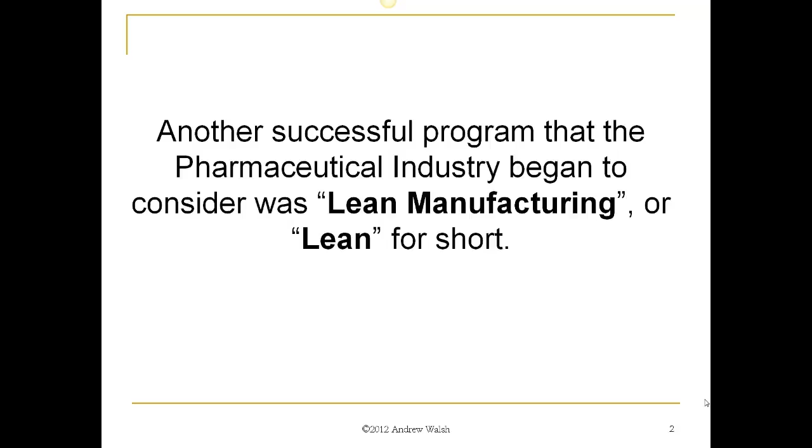Benjamin Franklin is recognized as one of the early thinkers on lean. He stated, on wasted time, he that idly loses 5 shillings worth of time loses 5 shillings, and might as well prudently throw 5 shillings into the river. Well said. On unnecessary cost, a penny saved is 2 pence clear. Save and have.

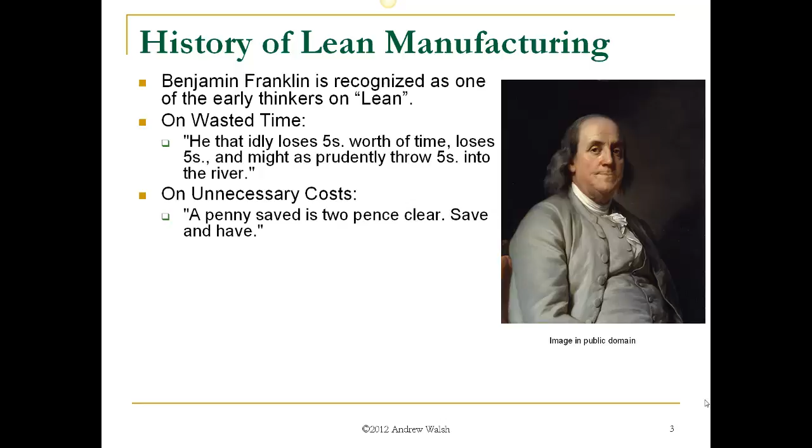On unnecessary inventory, you call them goods, but if you do not take care, they will prove evils to some of you. Buy what thou hast no need of, and ere long thou shalt sell thy necessaries. And many have been ruined by buying good pennyworths. How many of us have fallen prey to 50% off sales?

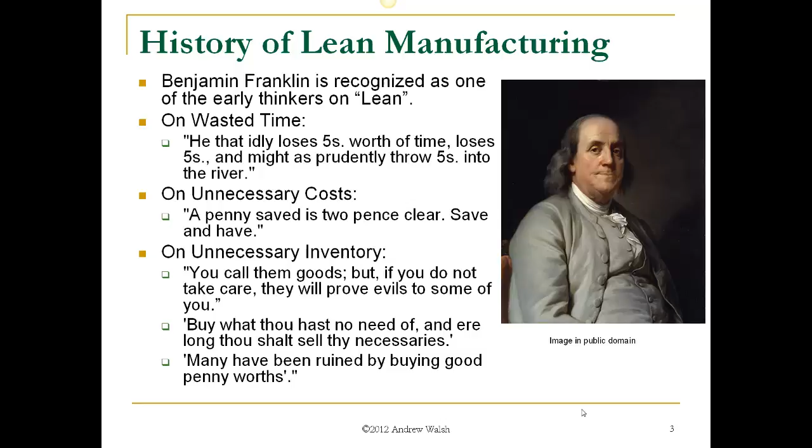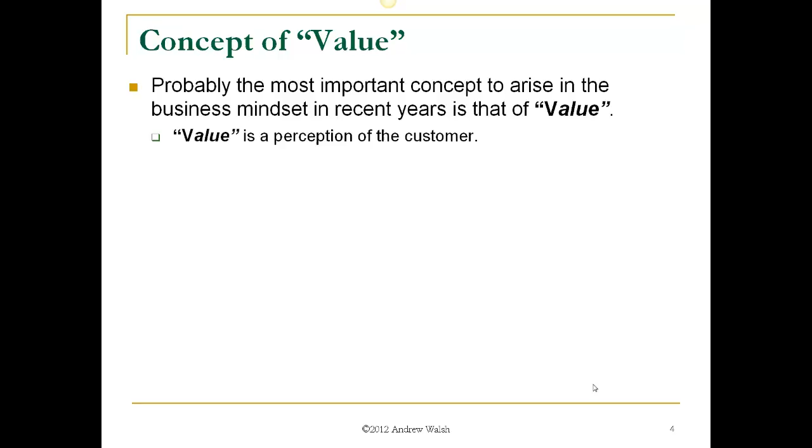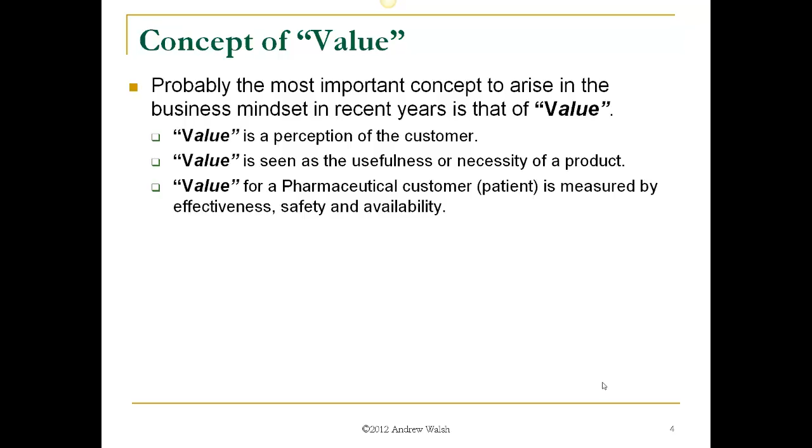Concept of value. Probably the most important concept to arise in the business mindset in recent years is that of value. Value is a perception of the customer. Value is seen as the usefulness or necessity of a product. Value for a pharmaceutical customer, a patient, is measured by the drug's effectiveness, its safety, and availability.

Value for a pharmaceutical customer, a distributor for instance, is measured by availability, the line item fill rate, delivery time, and other business requirements. Providing value to the customer will guarantee business success.

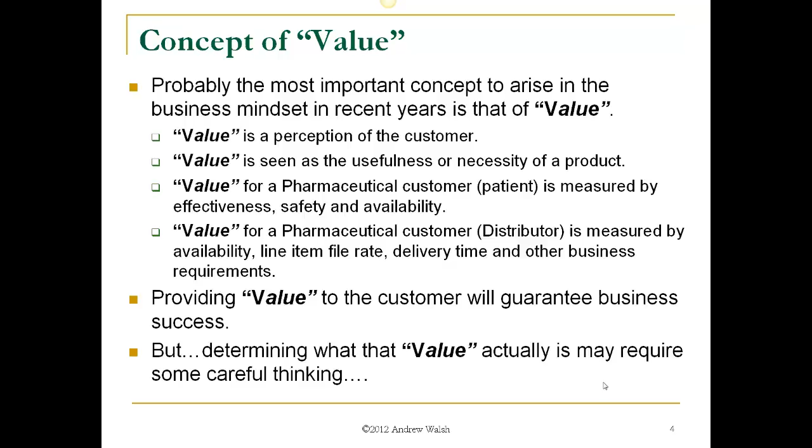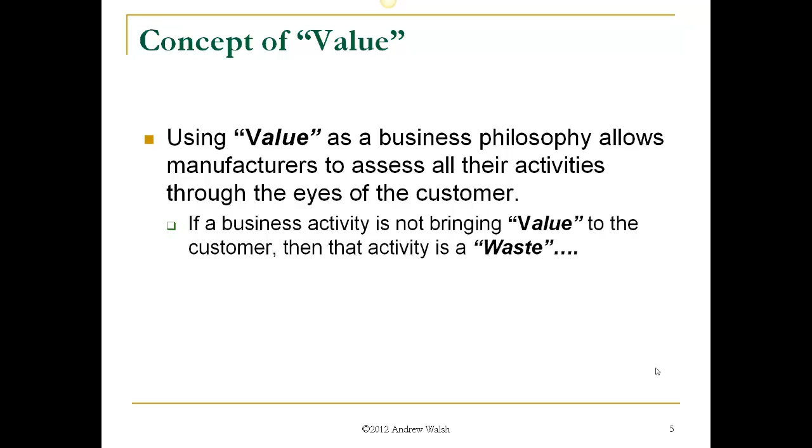However, determining what that value actually is may require some careful thinking on your part. Using value as a business philosophy allows manufacturers to assess all their activities through the eyes of the customer. If a business activity is not bringing value to the customer, then that activity is a waste.

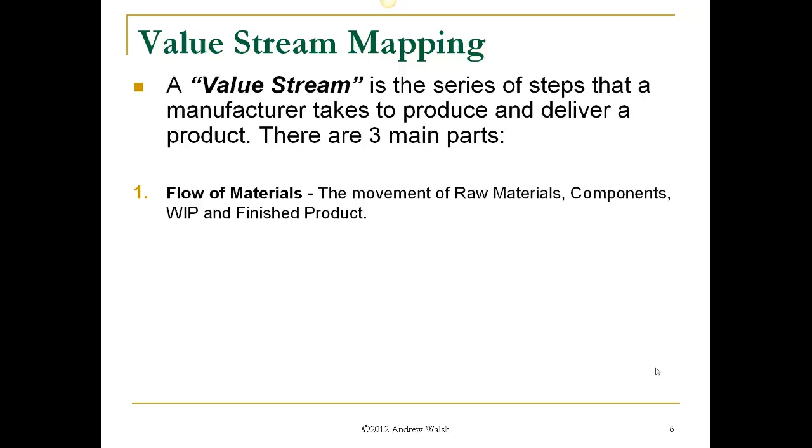A value stream is a series of steps that a manufacturer takes to produce and deliver a product. There are 3 main parts. The flow of materials, which is the movement of raw materials, components, work in progress, and finished product throughout the facility. The transformation of materials, where the raw materials and components are converted into the finished product.

And then the flow of information, which is the movement of information required to receive, process, and release raw materials, components, work in process, and finished product. For instance, the purchase orders for the raw materials, batch records for the batches, any investigation reports that needed to be processed, and analytical reports for release of raw materials and finished product.

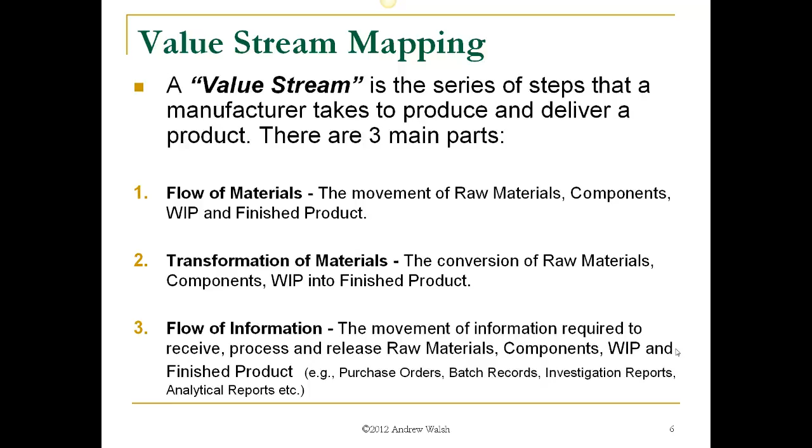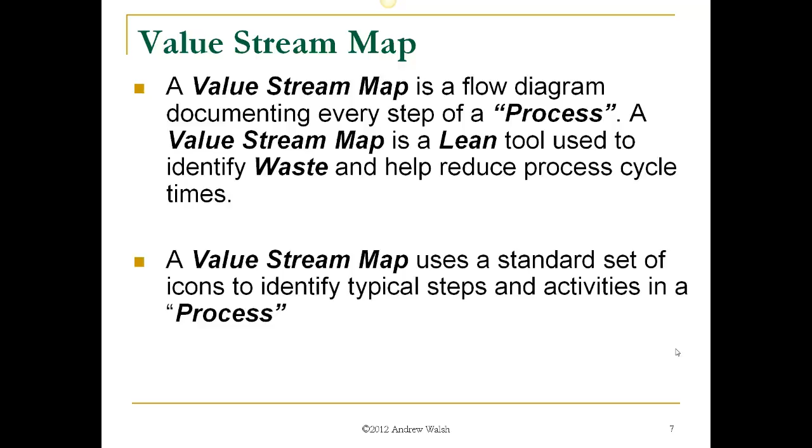A value stream map is a flow diagram documenting every step of a process. A value stream map is a lean tool used to identify waste and help reduce process cycle times. The value stream map uses a standard set of icons to identify typical steps and activities in a process.

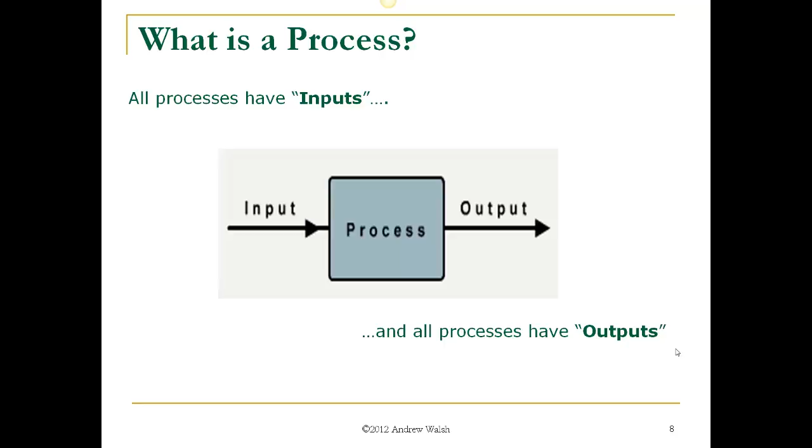What is a process? All processes have inputs, and all processes have outputs, as we will see in a few minutes. The value stream map uses a certain set of icons.

As you see on top left, outside sources, which would be raw material suppliers or even customers, are represented by a little house with 3 triangular roofs on it. Movement of materials is shown by a truck. Push and pull arrows are shown as I list them there. And the flow of information, etc., can be seen on these diagrams here.

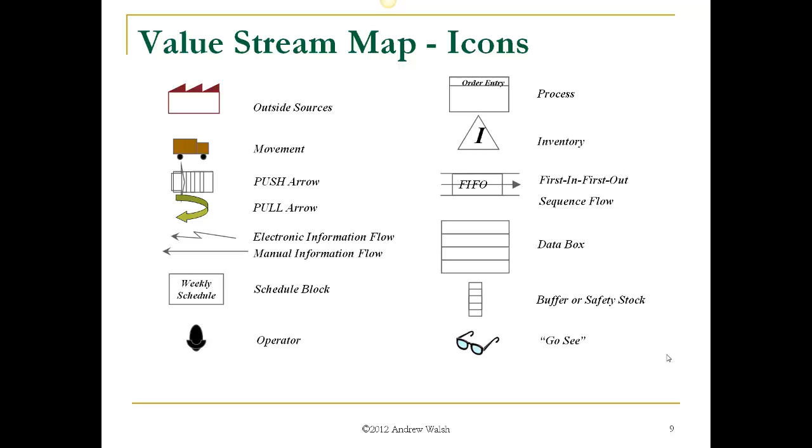Here's a value stream map. In the upper left-hand corner, we see 2 suppliers, so raw material suppliers who are sending in maybe components or excipients, and they arrive at receiving, which may take 8 days for them to be received and processed.

Then they would move into a blending operation where there's 1 operator, and let's say that takes about 60 minutes, an hour for him to process the blend. Then the blend may sit for 2 days before it moves on to granulating. And there's 2 operators in the granulation, maybe making the granulation solution, 1 guy, and the other one actually operating the granulator. And let's say that operation takes 60 minutes also.

Then the granulation will sit for 1 day before going to the compression area. There's 1 tablet press operator, and it may take him 10 hours to compress the entire batch. Then that batch may sit for 25 days before it goes on to packaging, where there may be 5 operators, and maybe take 12 hours to do the final finished packaging.

And then it may sit for 15 days before it moves on to being shipped, as it needs to be released. The finished product testing needs to be performed, all reconciliation, the batch record needs to be approved, etc. That gives us a total lead time of 52 days from the minute we get raw materials in, receive orders.

And there's only 1 day of value added time in that whole sequence. So only 1 day of the process time was value added. The rest was simply sitting in inventory.

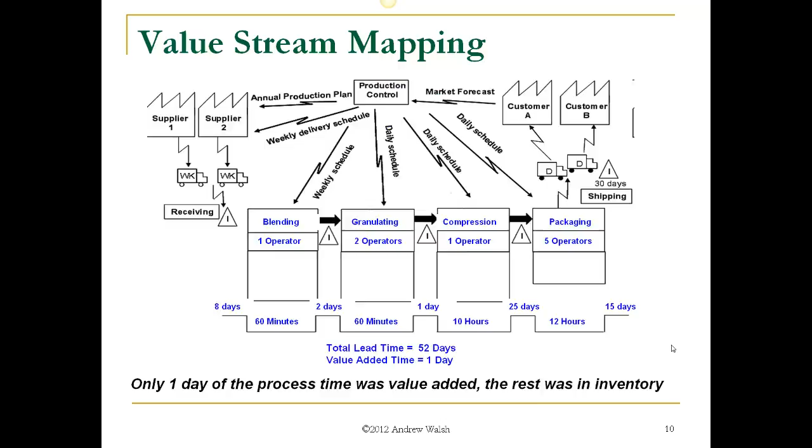And here we see the flow of materials. We see the transformation of materials and the flow of information all on this one diagram. So the entire process of manufacture is captured on one page here.

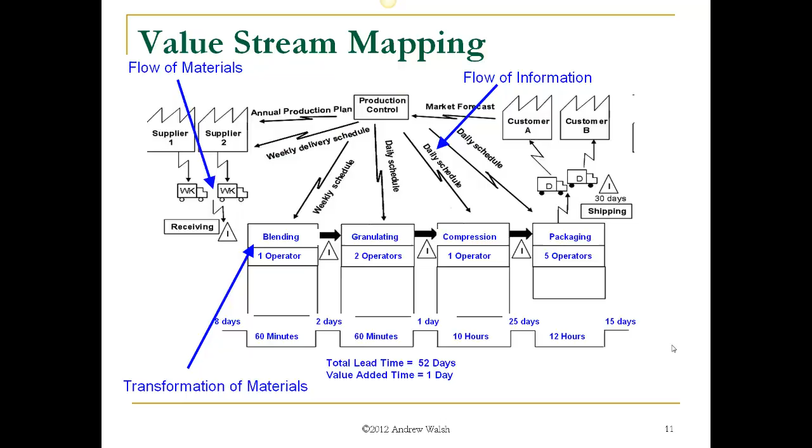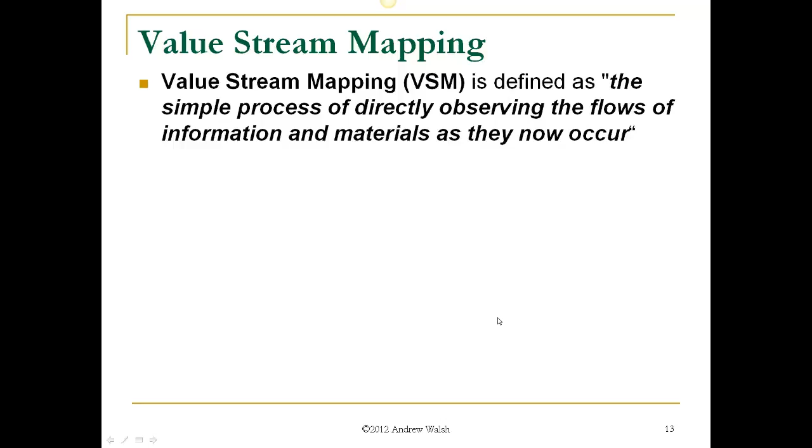Value stream mapping is defined as the simple process of directly observing the flows of information and materials as they now occur. This process allows companies to map the flow of products from raw materials entering the facility through all manufacturing process steps to the distribution department as finished product.

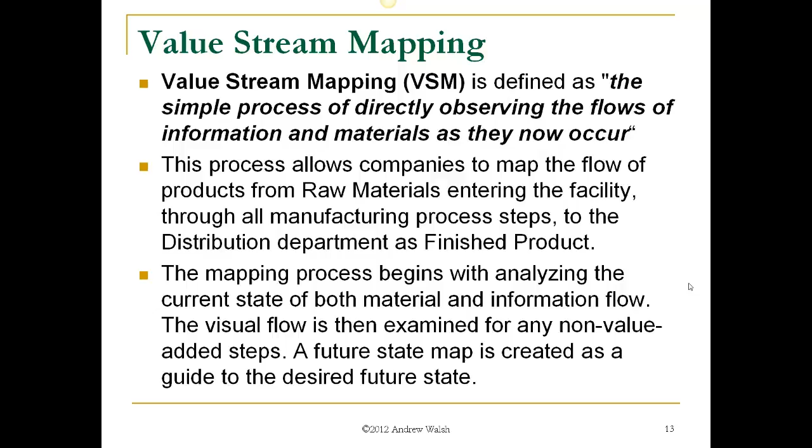The mapping process begins with analyzing the current state of both material and information flow. The visual flow is then examined for any non-value-added steps, and it's very easy to find them. A future state map is then created as a guide to the desired future state.

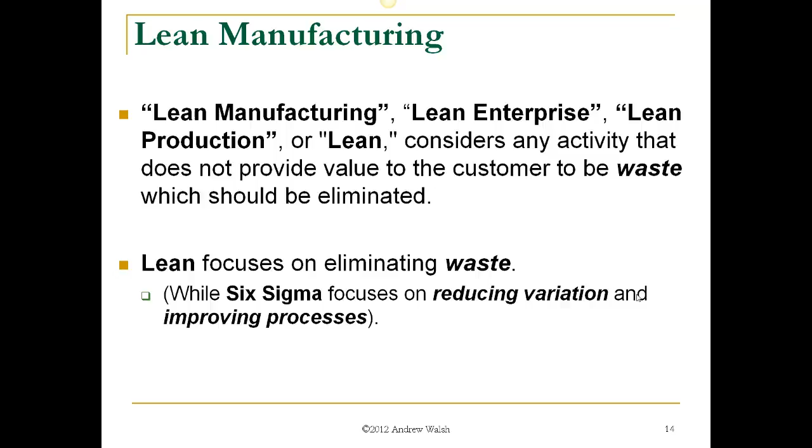Lean manufacturing, or lean enterprise, or lean production, or just simply lean, considers any activity that does not provide value to the customer to be waste, which should be eliminated. Lean focuses on eliminating waste, while Six Sigma focuses on reducing variation and improving processes. We'll see in the next module how those two can be combined to good effect.

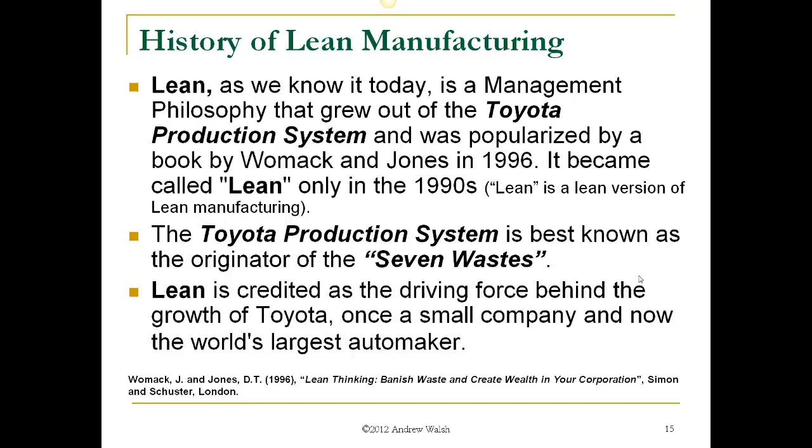Lean, as we know today, is a management philosophy that grew out of the Toyota production system and was really popularized by a book by Womack and Jones in 1996, and it became called Lean only in the 1990s. Lean, funnily, is a lean version of lean manufacturing. The Toyota production system is best known as the originator of the 7 wastes. Lean is credited as the driving force behind the growth of Toyota, once a little tiny company in Japan and now the world's largest automaker.

Toyota identified 3 forms of waste: muri, or unreasonable work demands placed on workers by management, asking for too fast or too heavy. I'm sure that will go over big here in the United States.

Mura, or unevenness in the execution of work. For example, production push at the end of a quarter to make better numbers. I've seen this where you want to make quota in order to get your bonuses, so we'll push more product out the door, stack them up, and make the numbers.

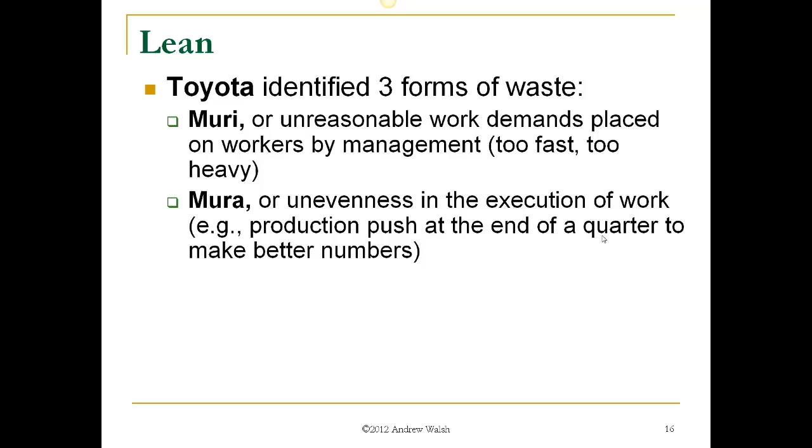Muda, or non-value-added work. Muda and Mura, when discovered, are directed back at Muri, so changes can be made to improve the overall process.

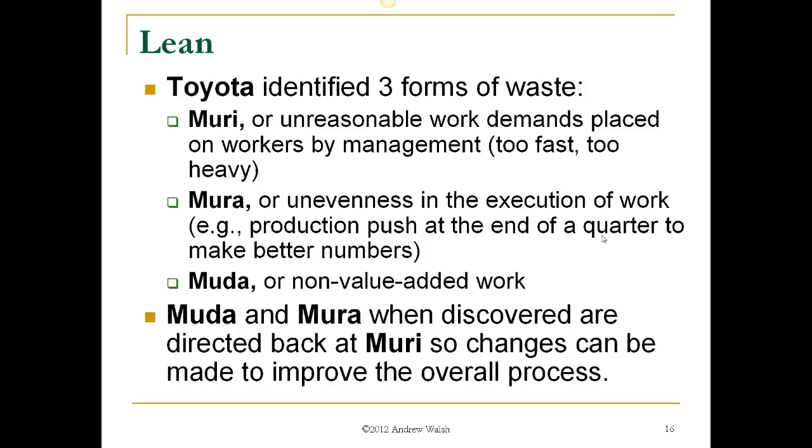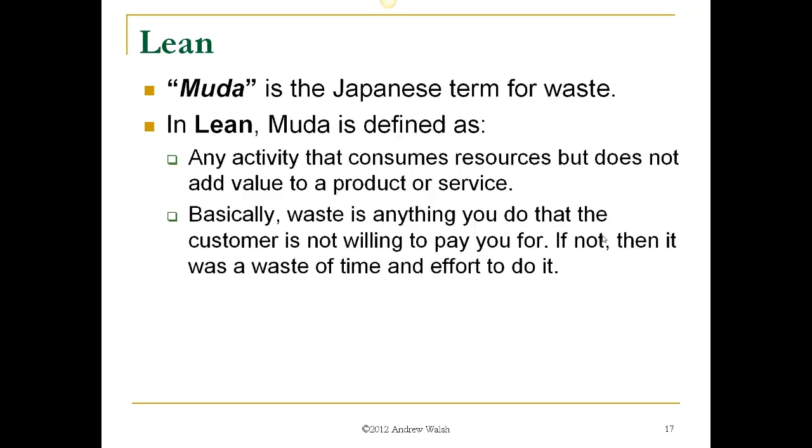Muda is the Japanese term for waste. In Lean, Muda is defined as any activity that consumes resources but does not add value to a product or service. Basically, waste is anything you do that the customer is not really willing to pay you for. If not, then it was a waste of time and effort to do it.

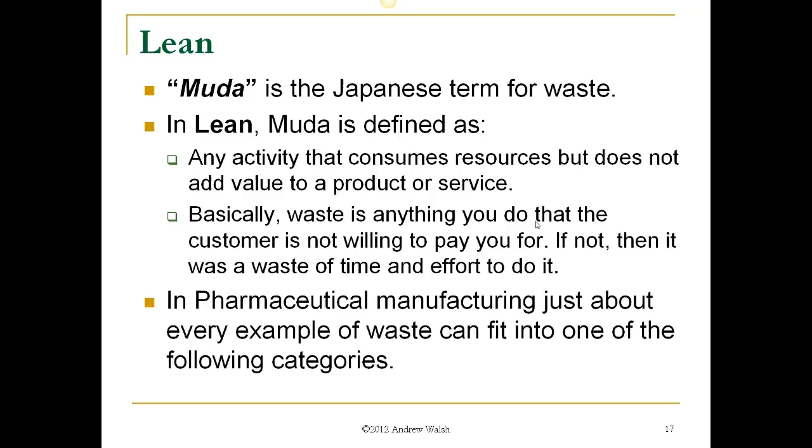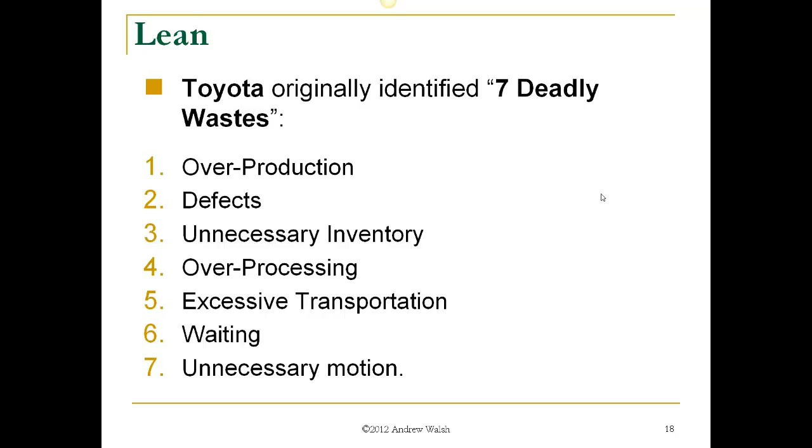In pharmaceutical manufacturing, just about every example of waste can fit into one of the following categories. Toyota originally identified 7 deadly wastes: overproduction, defects, unnecessary inventory, overprocessing, excessive transportation, waiting, and unnecessary motion.

Overproduction is when more product is produced than is actually ordered by your customers. Can you imagine going out for breakfast and ordering 3 pancakes and seeing the guy make 4, just in case?

Defects. Although defects are addressed under Six Sigma, defects are a waste due to the time and cost associated with their disposition, which the customer is not interested in paying you for.

Unnecessary inventory. This can take the form of excess raw materials and packaging components in storage, work in progress sitting around, and finished goods just standing in the warehouse being stored there.

Overprocessing. Any work done on a product that is not actually required by the customer, and this includes using equipment that is more complex or expensive than is required for that operation.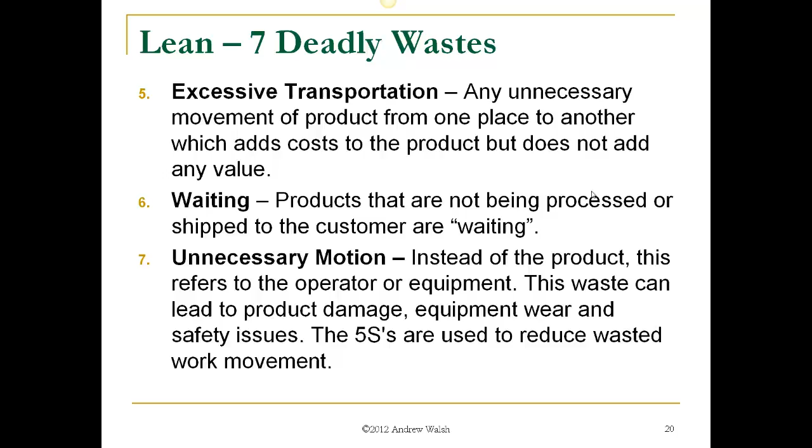The 5S's, which we'll see in a minute, are used to reduce wasted work movement.

There are 2 other wastes that have since been added: manufacturing products that customers don't want, for example maybe cheese-flavored soda—who wants that?—and unused human talent, for instance PhDs pushing a broom. Why would you have a PhD with all that education operating a broom?

There are now up to 11 additional wastes, and I won't get into them. The lean people are getting very creative with creating more waste.

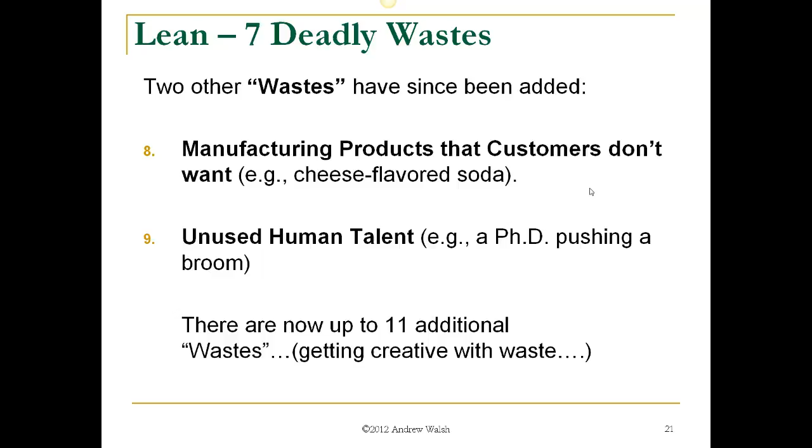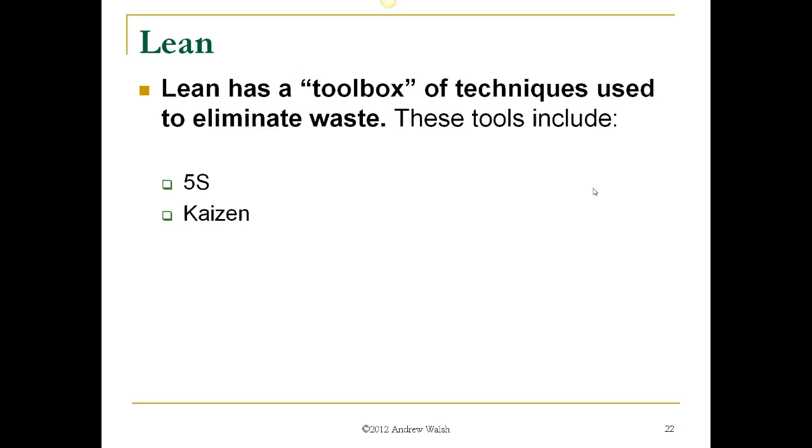Lean has a toolbox of techniques used to eliminate waste, and these tools include 5S, Kaizen, and error proofing, Poka-yoke.

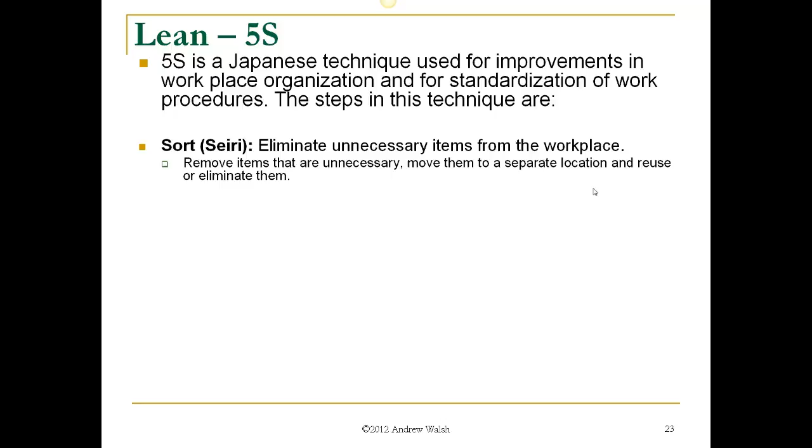5S is a Japanese technique used for improvements in workplace organization and for standardization of work procedures. The steps in this technique are sort, seiri: eliminate unnecessary items from the workplace, remove things that are not necessary, move them to a separate location and reuse them or just get rid of them.

Set in order, seiton: efficient and effective storage methods, a place for everything and everything in its place. This is a very old adage, and in my experience I've seen no place for anything and nothing in its place.

Shine, seiso: clean and maintain. Establish a daily housekeeping routine. Use this time to identify maintenance issues as you look around as you're cleaning and see if you see anything that's damaged and needs to be fixed.

Standardize, seiketsu: establish best practices. Identify best practices and establish these as routine. And sustain, shitsuke: continue the improvement for life. Establish a new standard of workplace organization.

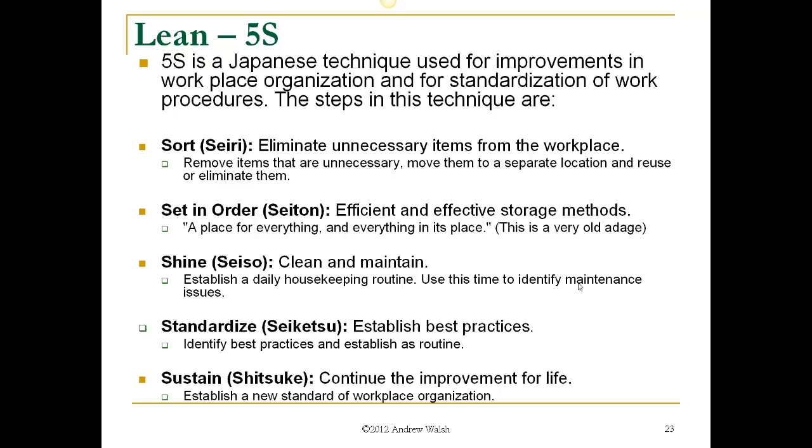Now, a spaghetti map is a map of work process showing the actual flow of work and distances traveled during the execution of a task. Work that has not been planned is typically laid out with little thought to efficiency, so the map takes on the appearance of a pile of spaghetti.

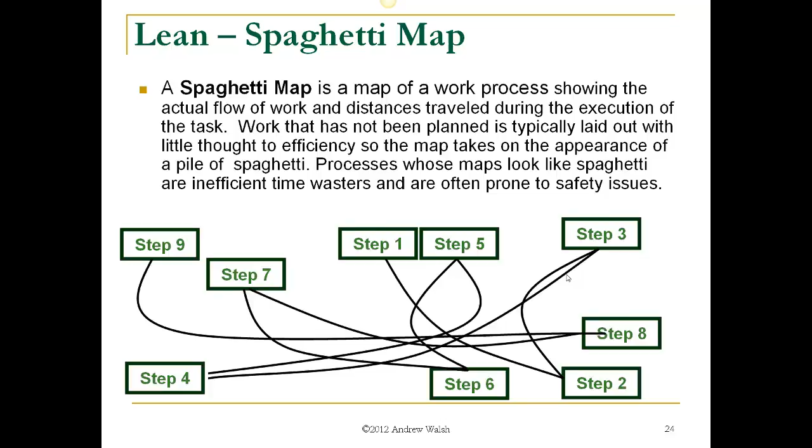Processes whose maps look like spaghetti are inefficient time wasters and are often prone to safety issues as well as quality issues. Here we see a process where step 1 to 2 to 3 to 5 goes all over the place. As you see, there are many lines crossing each other, so the flow of materials and flow of personnel have many opportunities to be in collision, and this can cause quality issues as well as safety issues.

Here's an example of applying the 5S to a laboratory setting. How exactly do these things fit in?

In the sort step, we would separate laboratory functions. They shouldn't be overlapping where two operators are working side by side and bumping into each other. So separate them, move them away from each other.

Set in order: organize your lab materials, put them in places where they're readily accessible and easy to find. Shine: just basic housekeeping, keep everything nice and clean.

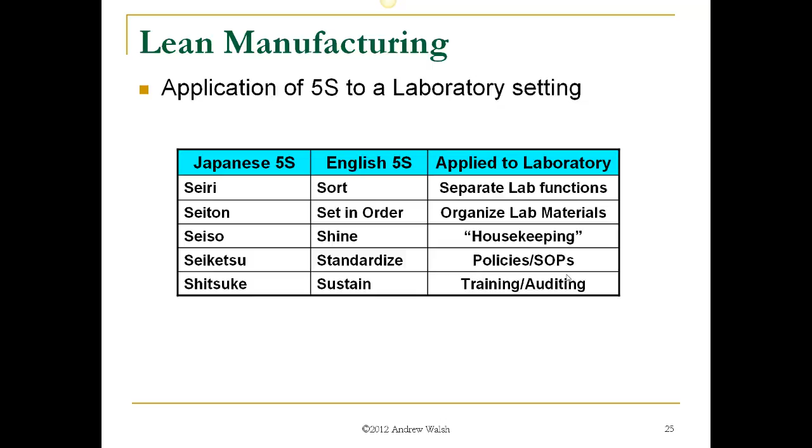Standardize: create policies and SOPs for how you should be doing things, making sure everybody has something to turn to that tells them what to do. Sustain: training and auditing—training on SOPs and policies, and auditing to make sure everybody's doing it correctly.

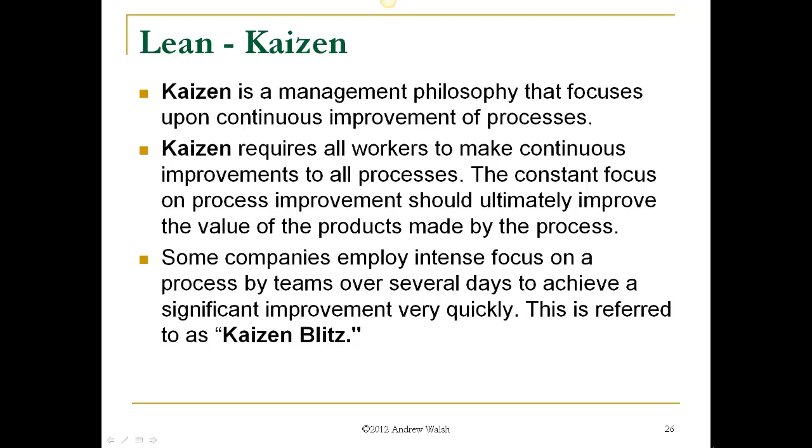Kaizen is a management philosophy that focuses upon continuous improvement of processes. Kaizen requires all workers to make continuous improvements to all processes. The constant focus on process improvement should ultimately improve the value of the products made by the process. Some companies even employ intense focus on a process by teams over several days to achieve a significant improvement very quickly. This is referred to as a Kaizen blitz.

There's only one way to plug it into the wall. You can't plug it in incorrectly. How many of you have been frustrated by USB sticks that you're always putting in the wrong way because they're not designed to go in one way only? You can try to put it in the wrong way. Different size fuel dispensing nozzles also prevent cross-fueling.

You want to make sure that you're not putting diesel into a regular engine or regular into a diesel engine. Different hose connectors are used for breathing air lines and nitrogen lines.

This grew out of the fact that, far too often, people hooking up to breathing air instead hooked up to a nitrogen line. This resulted in fatalities. So this is an important Poka-yoke that has prevented future fatalities—they don't happen now because you cannot hook up incorrectly.

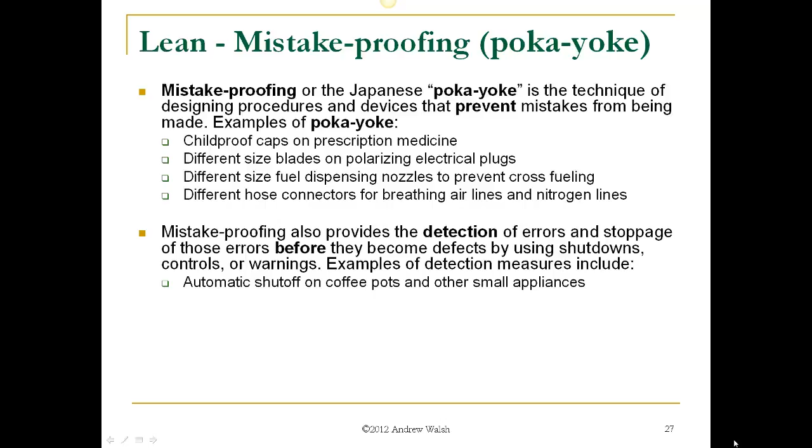Mistake proofing also provides the detection of errors and stoppage of those errors before they become defects, using shutdowns, controls, or warnings. Examples of detection measures may include coffee pots that have automatic shut-offs when they reach certain temperatures or times, and other small appliances have these types of features.

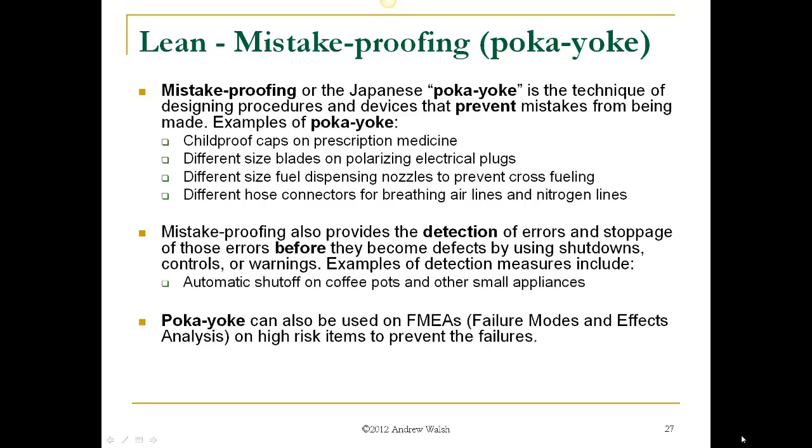Poka-yoke can also be used on FMEAs, failure modes and effects analysis, which we'll look at later on in the course, and on any really high-risk items where we see very serious risks. Poka-yoke techniques can be used to prevent the failures from ever happening.

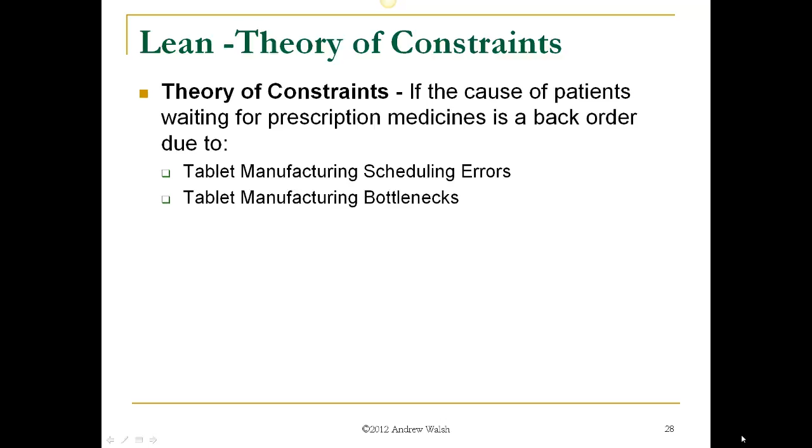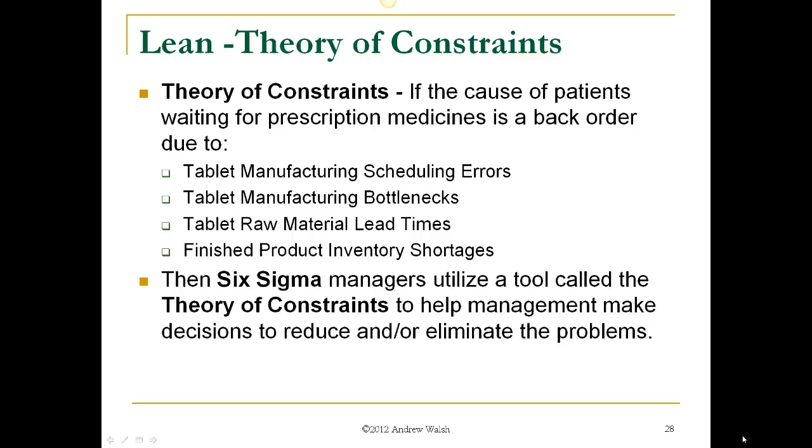Theory of constraints: if the cause of patients waiting for prescription medicines, for instance, is a back order due to tablet manufacturing scheduling errors, tablet manufacturing bottlenecks, tablet raw material lead times, or finished product and inventory shortages, then Six Sigma managers utilize a tool called the theory of constraints to help management make decisions to reduce and/or eliminate the problems.

Theory of constraints focuses on system improvements by first paying attention to the weakest link of the system. A constraint can be physical, for instance a milling machine, or non-physical, such as the release of a batch by the lab. The theory of constraints has 5 steps.

1: identify and prioritize the constraints. 2: exploit the constraints—try to optimize the process without major changes to the constraint. 3: subordinate everything else—based on the constraint, subordinate other processes to match that constraint.

So there's no backup of materials and things like that—slow everything down to meet the speed of the one constraint. 4: break the constraint—if the output does not meet requirements, consider making major changes to the constraint, for instance maybe buying new equipment that's faster. 5: repeat—once the constraint is broken, return to step 1.

With the initial constraint now resolved, a new constraint will now appear. Those of you who have done any plumbing will know that when you have a leak somewhere on newly installed piping, once you tighten up and solve that leak, the pressure now moves somewhere else and it starts leaking somewhere else. You keep tightening and tightening until none of the joints leak anymore.

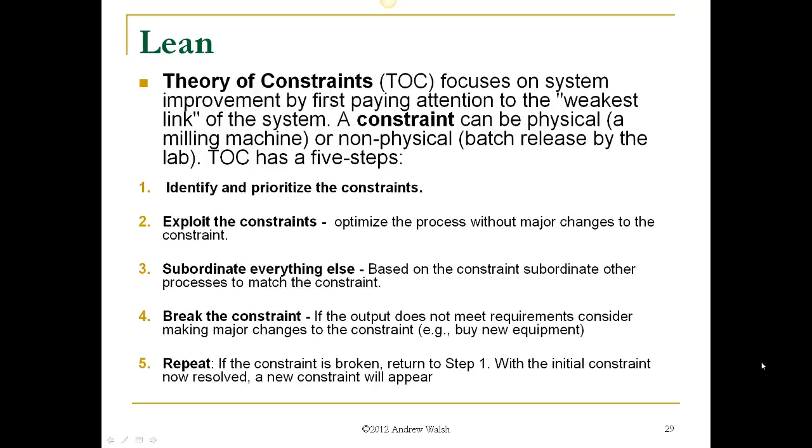Theory of constraints metrics defines 3 operational measures to determine whether an organization is moving towards its goal: increased throughput, decreased inventory, and decreased operating expenses. The following 4 measures are used to identify the results of the overall organization: net profit, return on investment, overall productivity, and turnover.

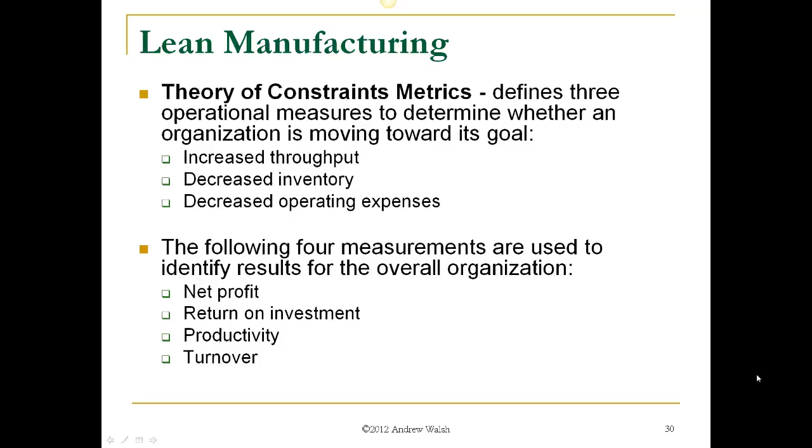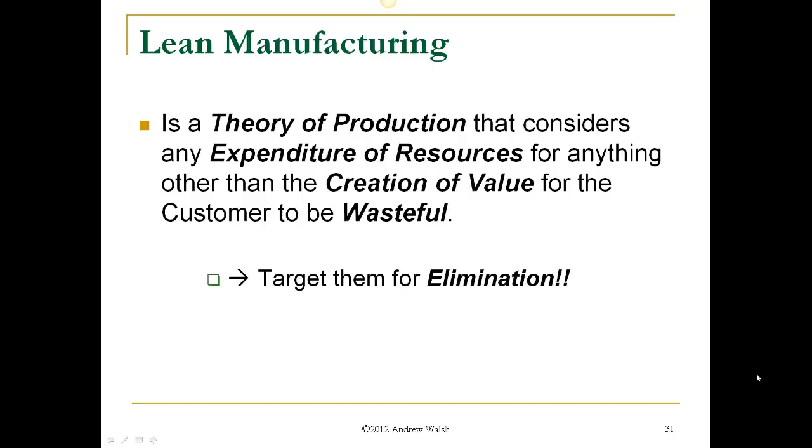Now, lean manufacturing simply is a theory of production that considers any expenditure of resources for anything other than the creation of value for the customer to be wasteful, and you should target them for elimination.